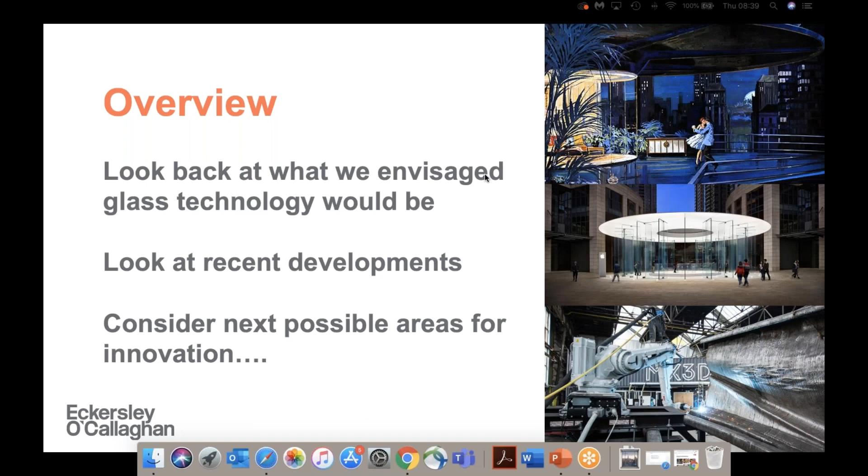So, given the type of specialist work EOC does, we often get asked the question. Sorry to interrupt you. The screen I see is just the Future of Glass retrospective. It's not gone into full screen mode yet. I can see your whole PowerPoint window. Okay, it's in full screen mode my side. I think it's stuck here. It says pause. Can you click the play button? I will press play. Is that any better? Nope, not yet. I will come out of it and come back into it again. Sorry about it. Yeah, I can see it moving now. Can you put the full screen now? Okay, it's full screen now. It's working fine now. Go ahead. Okay, I'll carry on. Yes, perfect.

Yeah, so I was saying, given the type of specialist work EOC does, we often get asked the question, what's the next big thing, or what will glass technology look like in perhaps 10 years' time? And I think this says a lot about people's desire to have the latest technologies and materials, normally before their rivals, and how we dream and imagine of solutions that don't yet exist, just out of reach, or more often than not, way out of reach.

Whilst we can use the metaphorical EOC crystal ball to get a good idea of what's on the horizon through our close links with industry and monitoring trends, our answer to these questions will always have its limits. But this got me thinking about what were the questions and imaginings 50 years ago? How close or how far have we come from realizing those today? So today I will look back to what we envisaged glass technology would be, look at some more recent developments and consider possible new areas for innovation in the future.

The 1960s are pretty synonymous with sci-fi futuristic images, and freed from technical constraints, people's imaginations often ran riot to project visions of their wants and desires. This was during a time inspired by the rapid and audacious achievements of the space age, so it was only natural to speculate about what was coming next.

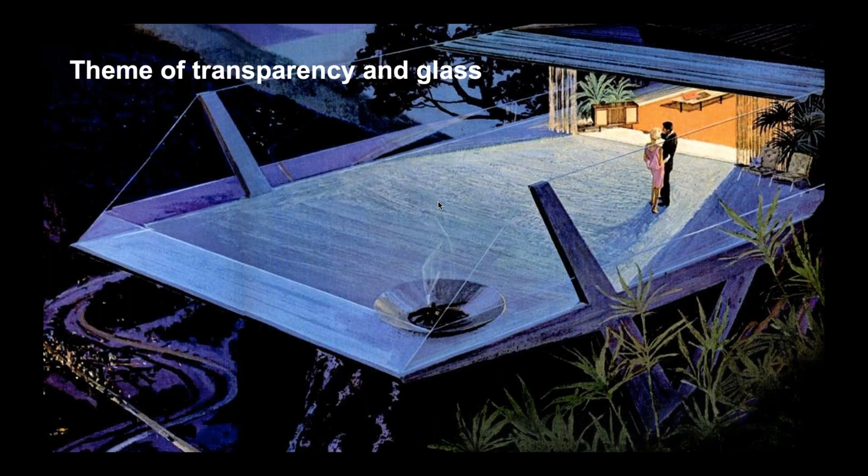It's perhaps no coincidence that around this same time, the possibilities for glass on buildings advanced significantly through the revolutionary float glass process that had been developed by Pilkington. This meant that large volumes of high-quality glass could be produced for the baby boomer generation. And this innovation must have stimulated great inspiration for what the future may hold for glass technologies. But I would ask the question, has there been a revolution on the same scale since?

A common theme in the illustrations is this one shown here, which seems to be some sort of luxury residential building, shows large format glass panels. These ones here appear to be around perhaps 6 meters tall, 3 meters wide. And with today's fabrication capabilities in large format glazing, the vision of the future is actually a reality. And in fact, it could have been a lot more ambitious. Some manufacturers can now fabricate panels up to 20 meters tall.

Some examples I'm showing here, this one from an Apple store in Boston, where we had to, at the time, utilize spliced laminated glass owing to the size limitations. And other examples, this one here in Hong Kong, this is 16 meters tall, as is this one in Singapore on Orchard Road. These were all made possible by significant leaps forwards in the manufacturing process, led by manufacturers such as seele, by investing in autoclaves that could laminate the glass into one piece.

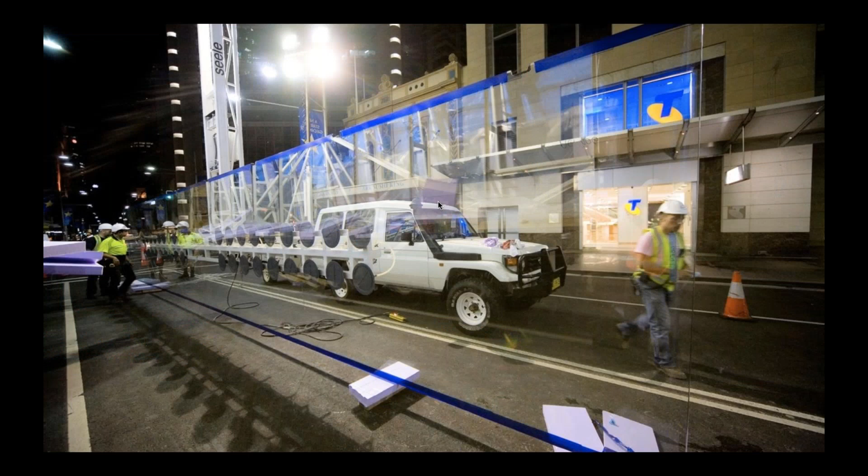In addition, thanks to current interlayer technologies such as SentryGlas, it's actually possible for the mullions and fins that were shown on the 1960s apartment to be completely removed. You can actually have the glass spanning from the floor to the ceiling without any additional supports. And there's an example shown here for an Apple store in Sydney that utilizes this process.

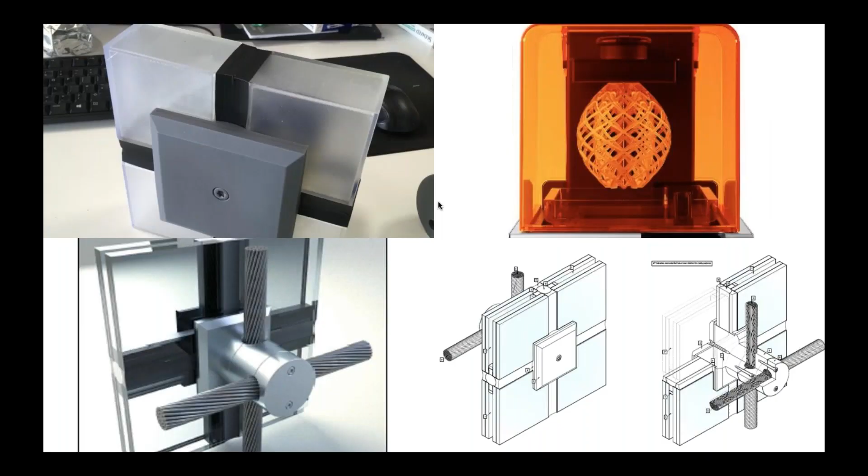Although not always made from large format glazing pieces, cable facade systems also enable large surface areas with quite minimal structure and maximum transparency. This is a project we worked on at Wisdom Hall in Bangkok that I'm sure Andreas will talk about a little bit later on today. And a key to successful delivery of these cable type systems is focusing in on the glass to the cable details. And this is something we spend at EOC a long time agonizing and analyzing and refining.

More recently, we've been advancing this concept further by fully integrating the cables within the glass system, so they're hidden, and they also utilize large format glass, creating facades that are achieving maximum transparency, as shown in this example from a Swire project at Taikoo Place in Hong Kong. This is something we're currently working on. It's around 15 meters tall, but you can see here, it's really achieving this maximum transparency, minimal structure aesthetic.

But where will the glass size stop? Transport and logistics are big limiting factors, but perhaps it's no good getting longer and longer panels if we're still stuck at 4 meters width. This example shown in this apartment overlooking the city below shows some single curve glass, perhaps around 4 meters tall. And again, this is achievable today with 18 meter long curved panels actually possible, subject to certain radius limitations, as shown here from an Apple project we did a few years back in Shanghai.

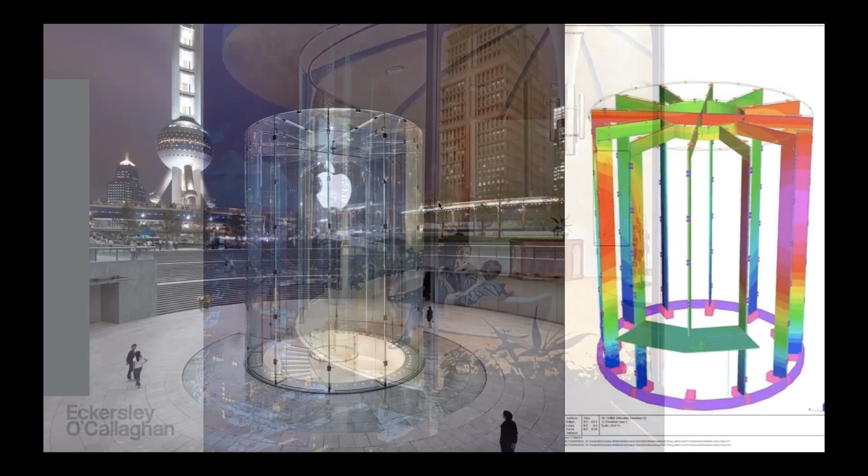But why were they confined to single curvature? Doubly curved panels can be manufactured to high optical quality using hot bending over molds, but strengthening is actually limited to chemical toughening, which then has an impact of limiting the size and also possible environmental coatings that are often needed for today's buildings. This project in Brussels combines flat tempered glass with single radius tempered glass and slumped complex curvature glass to create an interesting aesthetic that responds to the surrounding architecture, and again has no fins or mullions.

Recently developed cold bending techniques allow flat glass to be pushed into shape and then mechanically restrained in position either using the interlayer during lamination or via clamping on site. And this has opened up more possibilities in terms of size and geometry for curved glass. An example of this is the recently opened Apple store in Singapore in the Jewel development, and the visual quality is actually improved over other traditional techniques.

Today's interest in challenging transparent envelope geometries is inspired in part by advances in curved glass processing, but also by a progression in digital design. And I'll talk about this a bit more later on. As a result, we're seeing a great demand for ever more complex geometry, but this can sometimes be limited by costs, strengthening techniques, and the available coatings.

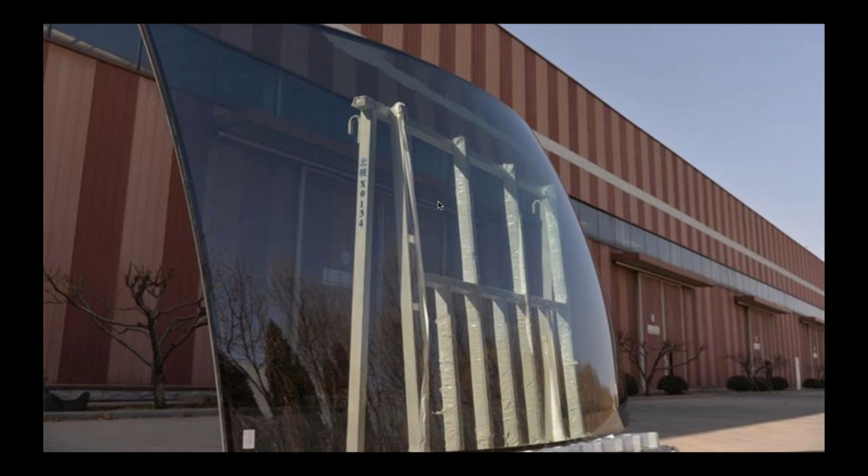But perhaps we are overdue a revolution in this particular area in curved glass, just as we had in the heyday of the float line process. And recent developments in double curved tempered glass make this a real possibility, as do further developments in adjustable and programmable molding technology. There are a number of groundbreaking projects currently under development that will show how much of a real possibility this is in the near future.

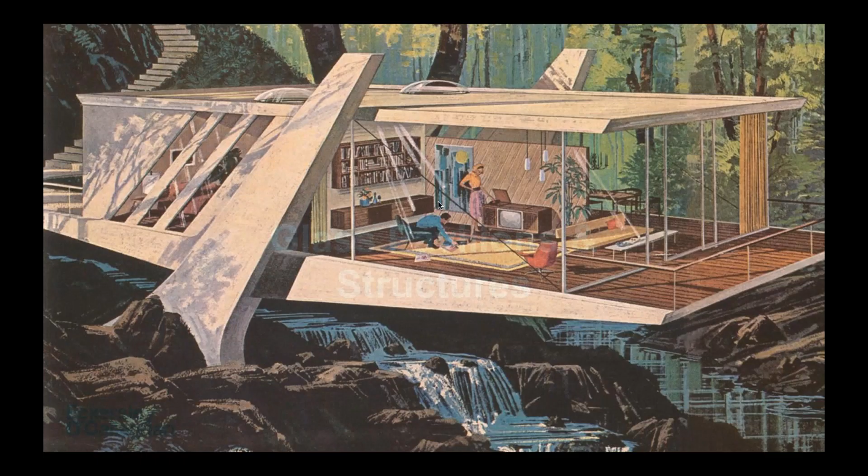This is quite an interesting image. I think it accurately foresees the idea of using glass as a structural element to create a full glass enclosure or pavilion. The idea of removing visually obtrusive structural elements has long been an objective for designers. And glass has potential for achieving this, but a lack of in-depth understanding of the engineering and a need for robustness has held this back until relatively recently.

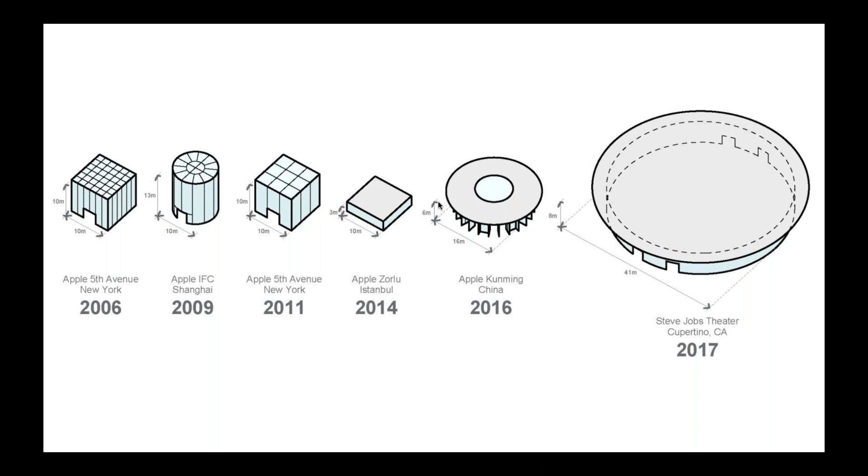I'm sure you know we've been lucky enough to work on a number of pavilion projects for Apple over the years, and on each one we've progressed and learned from the previous one. But perhaps one of the most well-known was the project in Fifth Avenue, the Fifth Avenue Cube, which has quite an interesting story because it actually started off life in 2006, comprised of 18 small panels per side.

But as production technology progressed, a few years later in 2011, it was redesigned and replaced with a structure that was comprised of only three full height panels per side, and therefore significantly increasing the transparency and removing the fittings, which often are the most visible elements. You can see an example of the difference here.

So from these state-of-the-art projects, we learned a lot, and so for the next one, we wanted to be even more ambitious. The Steve Jobs Theatre in Cupertino comprises a 40-meter diameter carbon fiber roof, supported on curved structural glass panels around the perimeter, and it just goes to show how far you can push the boundaries of glass as a structural material. Even the sprinklers and cables that go up to the roof are hidden within the glass joints. And to give you an idea of the scale, we can actually fit all the other Apple pavilions within the internal volume of the theatre.

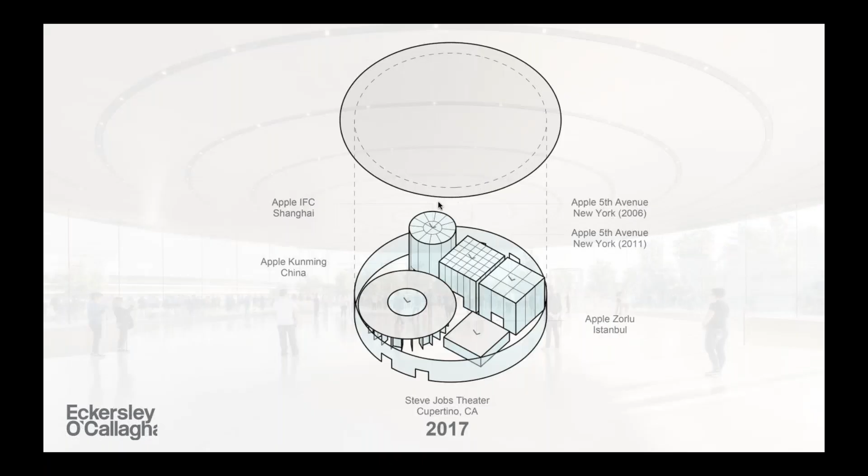Again, building on the success of this project, it led us to develop other structural glass pavilions, such as those shown here in Istanbul, and this one here in Kunming, which actually includes 5-meter tall pivot doors with titanium laminated fixings, a carbon fiber roof again, and a 6-meter spanning acrylic oculus in the center with no visible joints or supporting structure. And it also had to be designed to withstand relatively high seismic loads as well.

You can see that we're continually developing what's possible with glass as a structural material, and we have some projects under development that really push this to its limits and push the boundaries of what's possible. And perhaps next time I do a talk, I'll be in a position to share more information on that with you.

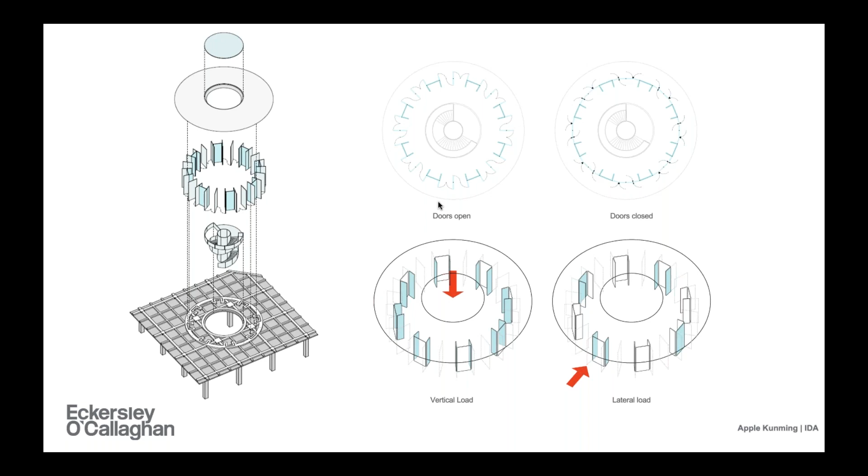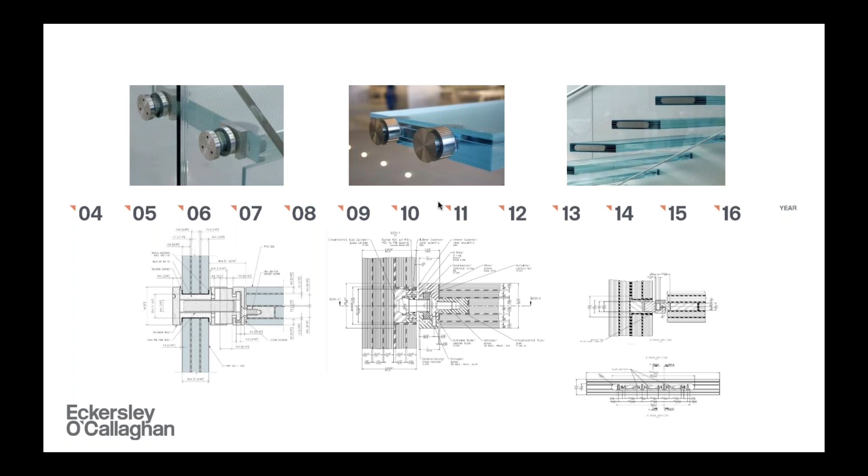I think achieving lightweight staircases that almost seem to float, as shown here, has always been a fascination for designers, even going back to the original cantilever stone staircases from many years ago. A lot of the development work we do around glass is about focusing on the detail and the fixings. And we always try to minimize them as much as possible to make them almost disappear. Some examples are shown here, which show how we could utilize the latest evolution in manufacturing process. But we think that we also played an important role within the project team in getting these developed in the first place.

In some ways, these ideas culminated in the staircase developed with Foster and Partners located in Guangzhou, which utilizes the glass facade to double up as the main support and therefore limits the number of visual elements. And as always, it's a nerve-wracking moment when they do the real life load test, although we have high confidence that it will work.

Over the last 10 years, we've realized increasingly transparent structural glass systems by incorporating fittings within the glass buildup. And I think the holy grail for all connections is to be fully transparent, and advances in transparent silicones and adhesives have huge potential, as does welding of glass seams together. And although glass sizes have increased dramatically with large format, they're still limited by transport logistics and local site constraints. And I think more intelligent methods of joining panels together is another frontier to be explored.

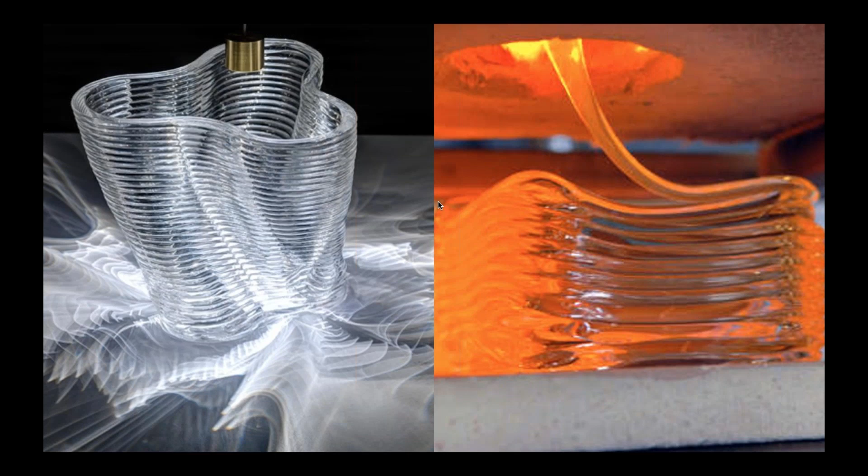For example, 3D printing of glass components is something currently being researched, as is the use of cast glass blocks, such as the example of the Crystal House in Amsterdam, which utilizes UV cure transparent adhesive. We've also been developing our own research projects, such as this glass seesaw shown here, mainly to show how technologies could be best deployed and give some inspiration for others in the industry.

Other transparent materials like acrylic could come to prominence owing to their ability for large panels with invisible joints, although their use is currently hampered by fire resistance and limited solar gain performance for facade panels, but this is something that is also currently being developed and progressed.

This is an example we're working on, a project in London which is currently under construction, the Skypool. This uses acrylic to span between two buildings around 14 meters, 9 stories high up in the air.

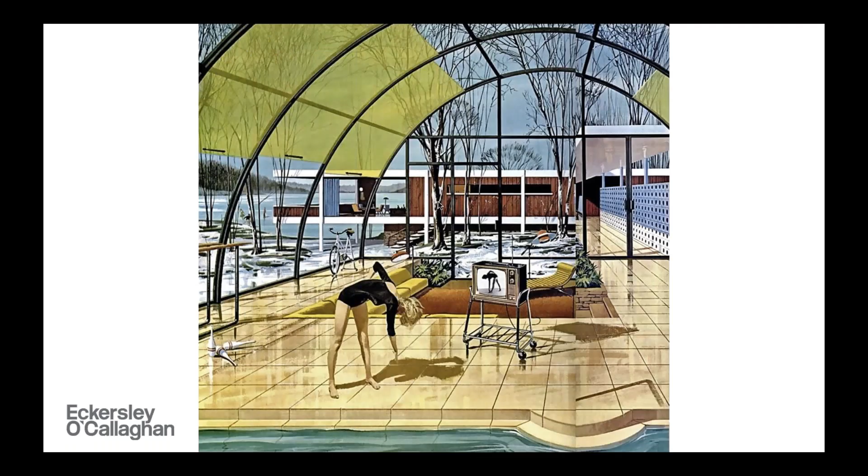This is quite an interesting illustration. It shows their idea of a futuristic glass enclosure that evokes perhaps the greenhouses of old. I'm drawn to the image's depiction of shading. It acknowledges a need for human comfort, but probably not the issue of energy consumption. There may have been less consideration of the solar gain and its associated sustainability impact back in the 1960s.

But since then, high-performance coatings and other glass treatments, including solar control and low E, have developed considerably, in part in response to ever-stringent energy requirements and code requirements. The big challenge is always how to overcome the contradiction of having better light transmittance, but also reducing solar gain at the same time. And today's standard technology offers perhaps more reflective and darker glass than was envisaged in this image, but it's making headway into achieving ever more transparent glass.

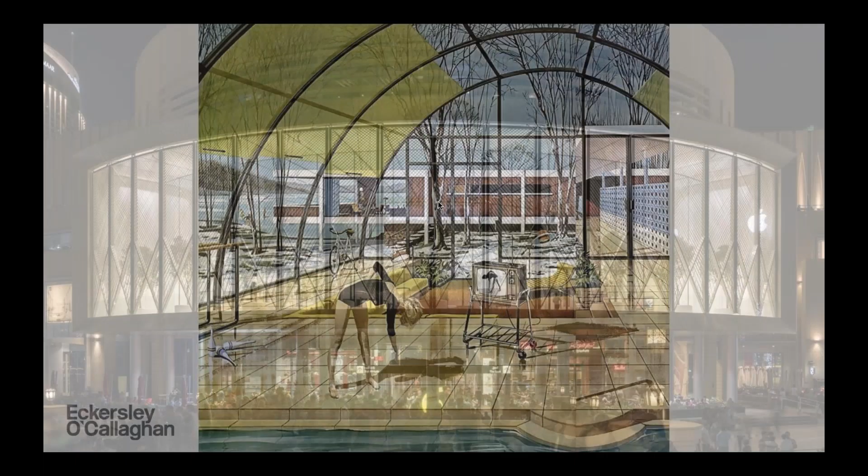Looking to tomorrow, current developments in dynamic shading and dynamic glass, which can change the light transmittance and G value, are promising innovations, especially for warmer climates. There are different approaches. For example, the Merck liquid crystal modules are intelligent glass facades that are linked to the building management system, and these could become more common as their costs reduce and people become more familiar and it becomes more established within the industry.

Another example is closed cavity facades with integrated blinds, which build on the development of older double skin facades, but integrating the elements into a single sealed unit and therefore reducing the overall thickness.

I think the thing that's becoming ever more important, though, is the embodied energy, the embodied carbon, and recyclability of glass and associated components. And it's not just the end performance, and I think this is something that needs full collaboration from across the industry to help deliver truly sustainable buildings of the future.

So what would we dream of today? If we were to produce a similar set of images, what would our imaginings of the future be? I wonder how much of today's glass developments would feature in these. Are we overdue another revolution, as mentioned earlier, with curved glass?

Or I suspect that we'll continue to see more incremental leaps, branching off into many varied performance aspects and requirements and systems, as shown here, some notable examples over the last 50 years. But there are some areas that we can see might be of particular interest, and I'll just share some quick thoughts, from my perspective, on how these could possibly develop.

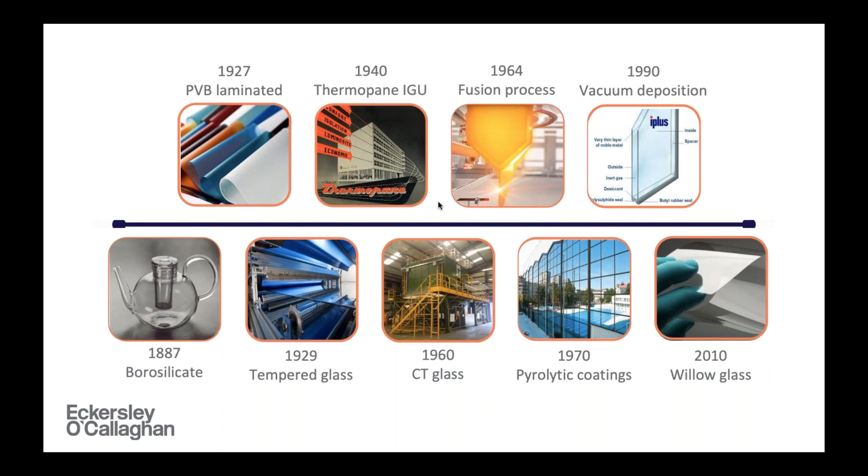So new materials: an area for inspiration could include the high-strength thin glass technologies. These were originally developed in the 1960s for the automotive industry, without great success at the time, but they've been revitalized for the smartphone industry. And they've yet to be really fully utilized within architecture, but they have some interesting potential for kinetic structures to enable adaptability, and also where weight saving is potentially important.

With rising sea levels around the world, will weight considerations become ever more important for things like floating houses as they are for ships today? We've been working in the sector for many years and designed glass for several large super yachts, which require both high strength due to the high wave loads and extreme environments, but also trying to reduce weights wherever possible.

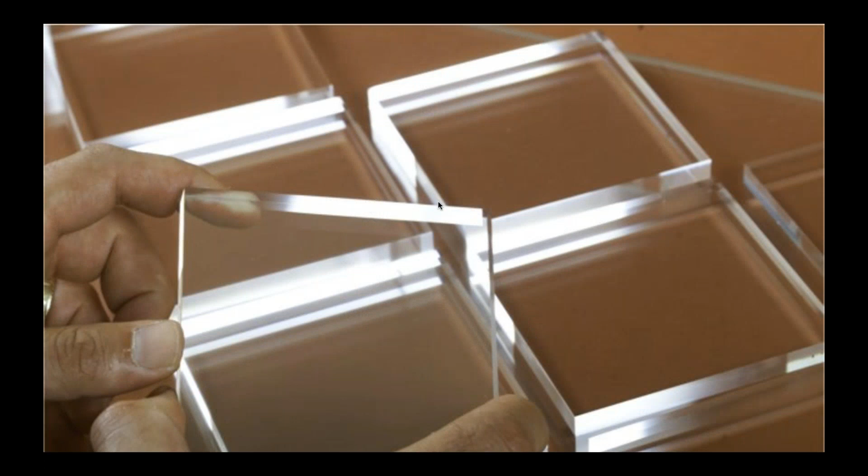There's long been talk of new transparent ceramics, such as so-called transparent aluminium or aluminium oxynitride, revolutionizing the industry. But today it hasn't made significant developments, partially due to costs and complex fabrication. But I suspect in the not too distant future, new transparent materials will become more widespread as evolutions in manufacturing processes continue to happen, and aligning with the digital design developments as well.

And just as discovery of things like graphene is infiltrating its way into mainstream use in other industries, I think that there'll be cross-pollination of ideas from other industries back into architecture. But I think sometimes it also takes clients to invest and develop these technologies for them to filter down to wider use within the industry, just as Apple did with large format glazing.

Although not a specific technology in itself, the processes and tools that we use to design and fabricate projects which incorporate glass have been advancing significantly recently. And we see digital design as an area that can really speed up progression on many fronts. An example is where we've developed our own scripts to analyze which curved glass types can be used within a complex envelope geometry. And we can make suggestions on how to optimize the curvature to make best use of the available technologies and hopefully reduce costs for our clients.

And it also allows us to optimize the structural design of large span steel and glass structures, as shown on this project. This is P&O project, Iona cruise ship, where reducing the weight was key in limiting the impact on the overall ship weights and buoyancy calculations. The digital design tools meant that we could reduce each of the section sizes down to the minimum, and more importantly, we could do it very quickly.

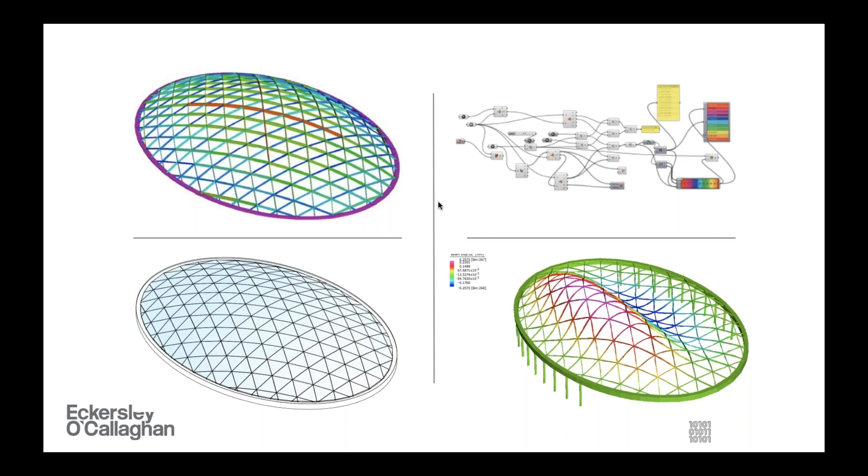But it's not just in the design that it adds value, it's also the possibility to truly link the designers with the makers, such as 3D printing developments that make it a really interesting, exciting prospect for the future. We've recently finished our concept project using these tools, and this is for a project on Mars.

In this image, you can notice that as ambitious as the architectural intents were for the glazing, the media and TV was fixed on what Motorola were producing at the time, which is perhaps understandable. This is an advert at the end of the day. But with the digital world so embedded in our culture, I see this as becoming more widespread in the future. There are technologies on the market today which integrate LEDs within the glass, but I can see higher image quality and definition and more transparency being what clients really strive for. And there are a few interesting new technologies on the horizon that will hopefully help to achieve this.

As I mentioned before, sustainability continues to be one of the key areas to develop and be at the forefront of what people are considering with the technologies. Products such as AGC's Fineo vacuum glazing that avoids the need for glass valves are very promising in reducing overall U values, especially for retrofits of older single glazed panels. And retrofits, I think, will become ever more important as part of the sustainability drive.

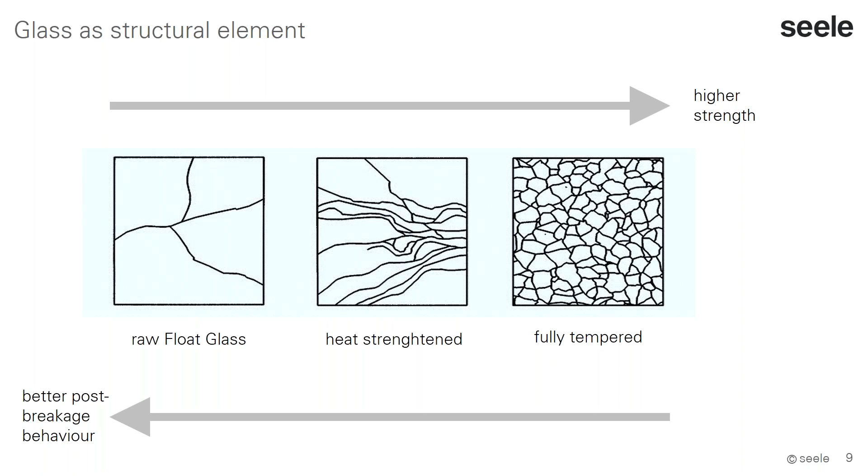So we have to keep in mind when we look at all the projects that are following now, that the higher the strength of a glass is, the smaller are the splinters it is breaking into. And the larger the splinters are, the better is the post-breakage behavior, especially in a laminated glass package. We have to keep that in mind. We always have to combine these kinds of glasses in the right way to achieve the structural behavior and the post-breakage behavior as we need it in our actual projects.

So now let's have a look at the rooftop viewing platform and glass cylinder for the Mahanakhon in Bangkok. Here you see the project. Most of you will know it. It's the highest building in Bangkok currently with over 300 meters. There is one glass tray, an observation platform there, and there is a glass cylinder, a double cylinder with a spiral staircase leading up to the rooftop. And then you can walk over to visit here this Skytray observation deck.

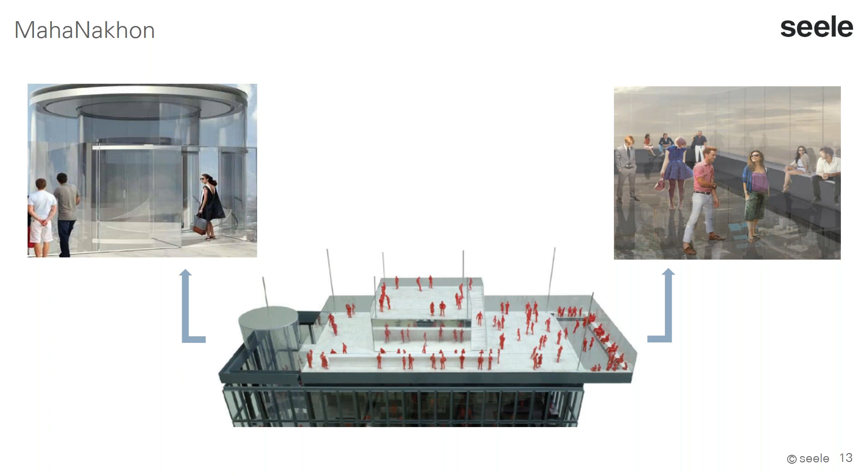So it's a 60 square meter observation deck we are dealing with here. And this is what we received in the beginning, mainly with the question whether we would be interested in doing that job. So we had the first meeting, and the discussion was that the architects' and the consultants' idea was having this glass tray here with a glass member below it supporting it. The issue was that the only offers they received were using steel members. Nobody dared to go with a glass member in such a platform.

So we went looking into that, and we came to the conclusion that it might be even better to have no glass or steel member there at all, but only have the glass panels spanning freely to the other side without any further support. So that was the proposal we made to the client, and the client decided that that is the way to go.

So when we are looking into this kind of structural glass application, there is one very, very important factor. That is that the SGP or PVB, whatever you use for the lamination of the glass, changes its elasticity modulus over temperature. The warmer it gets, the softer it becomes. So you have to consider that very carefully at the beginning of each project to come up with the right thickness of the laminated glass package. So we spend considerable time on these kinds of early assessments on a project.

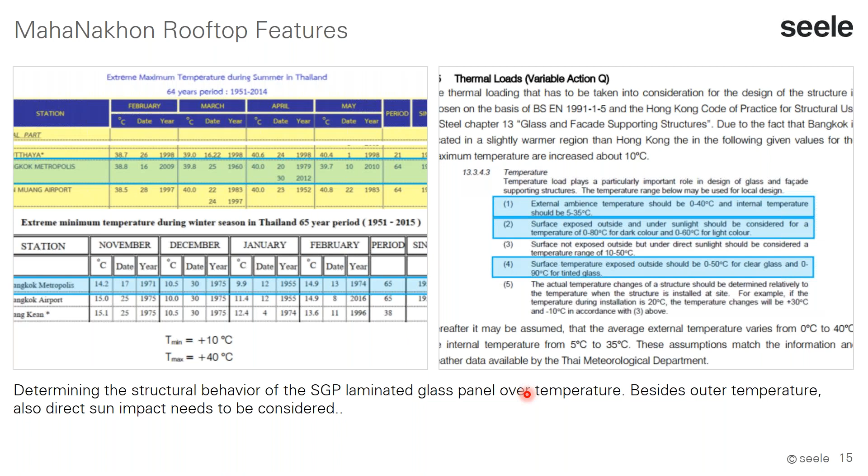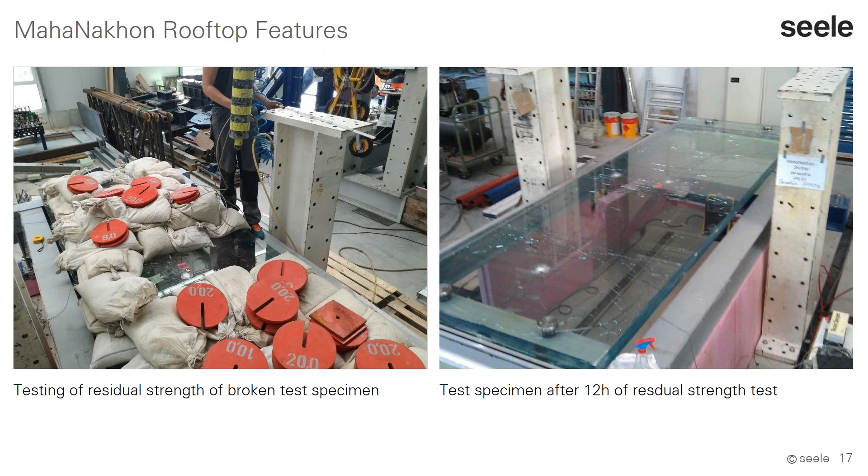So after we started working on the project, obviously we had to do a lot of testing. We did one of those glasses here. We did a permanent load test. We did a hard body impact test that you can see here. And we tested the residual strength of the broken test specimen. That's the test specimen here after 12 hours of residual strength testing. And this was, in the end, the result.

And we tested that extensively, and I can assure you this thing is as safe as any floor could ever be to stand and walk on. Even with a total failure, it will not fall down. It will sag down a bit, but it will be retained in its position and held back by those special point fixings along the edge of the glass.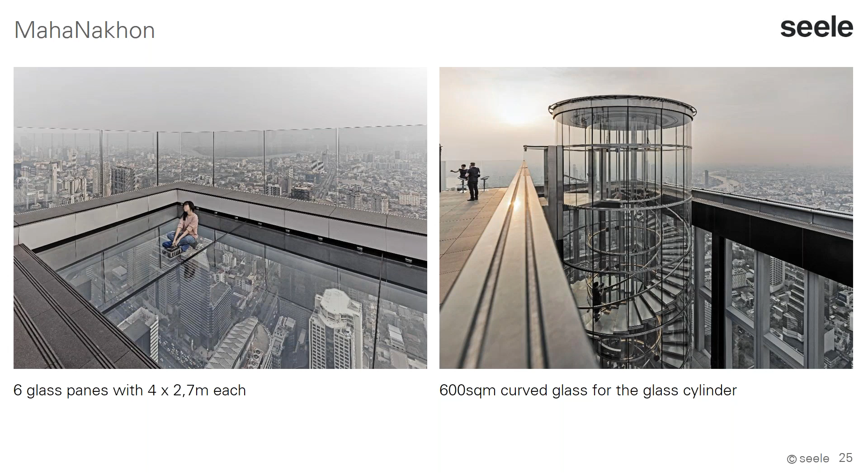So based on that design idea, we start then to develop a proposal. So we made the first 3D drawings. This is all via tender phase. We made the first 3D drawings or 3D models of it. We make the first structural calculations. Here we apply wind load. Even if it's an internal staircase, you still have to apply a certain wind load to it.

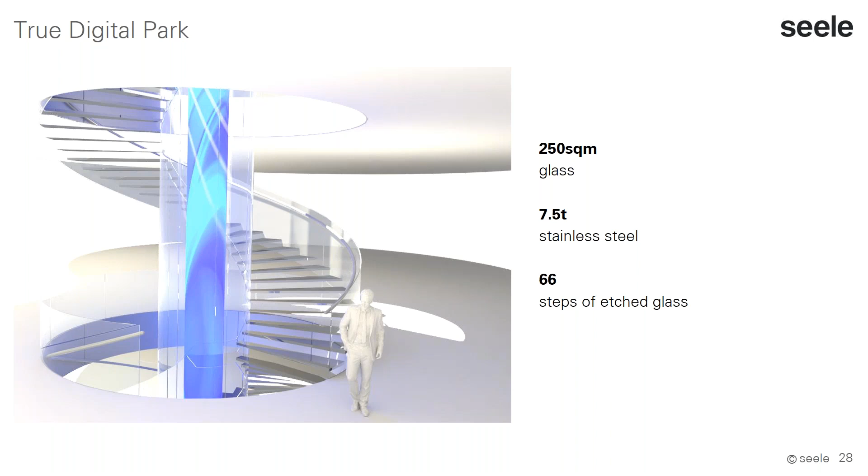Here you see the first assessment of the deformation under live load and the people walking up and down. So after we finish all those first structural assessments, we know the approximate glass thicknesses, and based on that, we can then do the first visualizations.

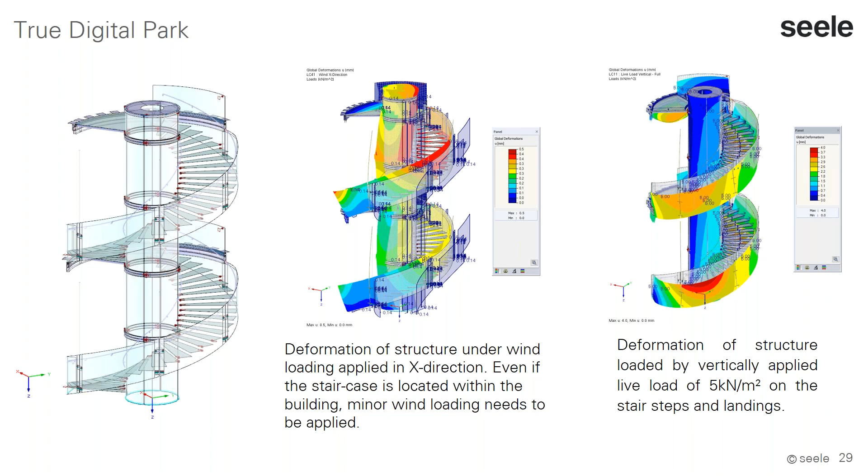So you can imagine the relative position of the inner glass cylinder to the outer edge here of the concrete needs to be perfectly aligned. Now the concrete itself is obviously not so nicely aligned. So we had to put a lot of effort into this construction here to equalize or to neutralize all the tolerances and bring the inner glass cylinder into perfect position relative to the edge of the hole in the floor, or to the steel connection construction on the edge. This needs utmost attention, and it takes relatively long to get that properly done.

Then we start with the installation. Again, here we have a wood scaffold to go up and up and up. And then when you already think you are up and you are very happy, then it happens, a glass breakage here. And you can see it happened on the lowest level. It's the lowest glass of all glasses. So kind of a worst case.

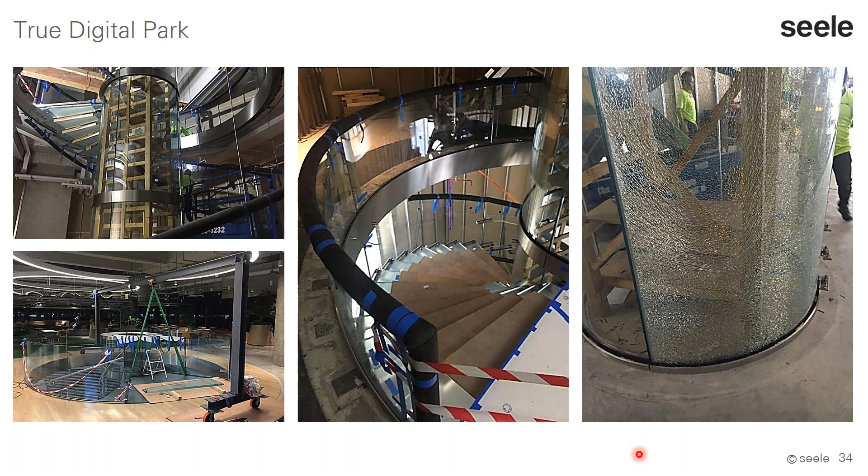Luckily, when we started with the design, we had several meetings with the client, and we could agree with him that we increase the size of the stainless steel hub, this ring that is going around the staircase. We increased it to a size big enough that it would allow the exchange of a glass in case of breakage, even in the lowest level, without de-installing the whole staircase and building it up again. That was a very, very good decision. So this stainless steel hub is now a little bit higher than it was originally architecturally anticipated, but it was a very wise decision to enable us to change the glasses.

So now let's have a look at Icon Siam. ICONSIAM is a huge shopping mall in Bangkok. We finished that project a little over a year ago now. Let's look into it. We have 5,300 square meters of this ICONLUXE facade, that's how it's called. The total height is up to 24 meters of spanning glasses. The glass panes are inclined in 2 directions, and they are arranged in a jagged zigzag pattern. And the floor plan is not just a straight facade, it's also curved. So you can call it a 3-dimensional nightmare, maybe. We have 333 glasses and 333 fin glasses here.

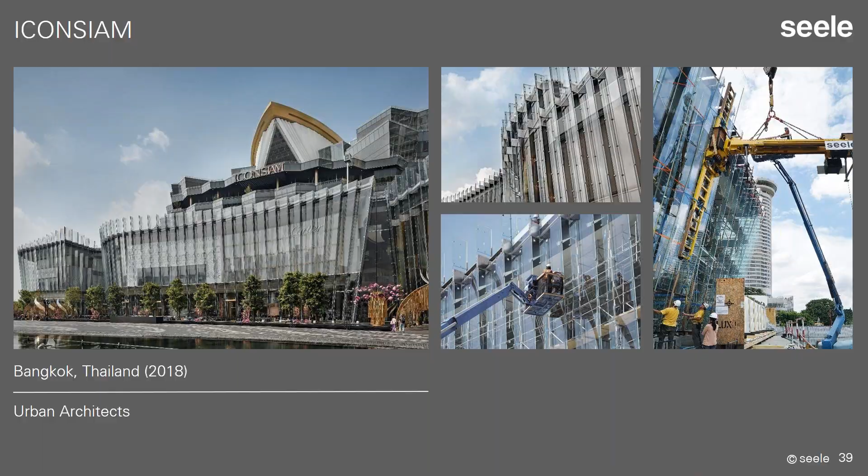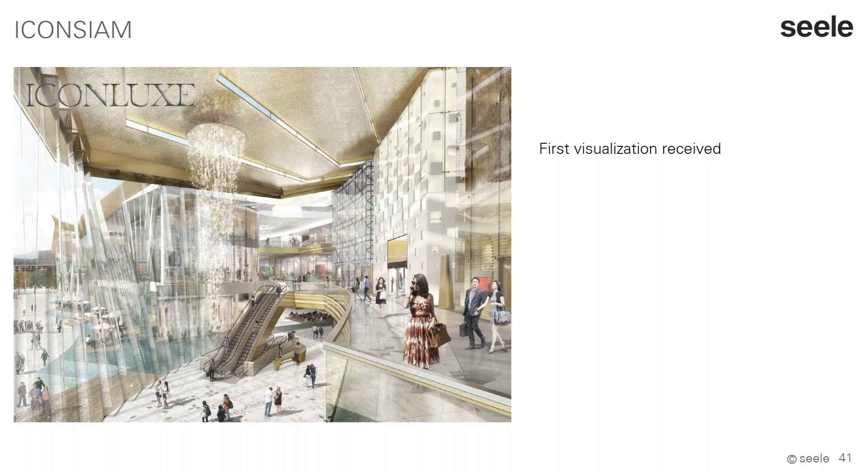So I received early 2016 this picture with the question, can you do it? I answered back, yes, maybe. It's hard to say whether we really can do it just with that, but that answer was enough to be 2 days later in a meeting in Bangkok discussing the project with the client. The client had a tender out already, but he didn't receive any satisfying answers back. Actually, he received more tender queries back than answers. The client did not want to give us the tender document, so he just gave us a SketchUp file on a memory stick. That's it. And based on that SketchUp file, we were supposed to come up with a price within 2 weeks' time.

So quickly, we started doing our first structural assessments again. We started doing some basic details. We did some first 3D visualizations of how the thing could look. We went into the estimation of the project and came up with the first pricing.

Another step, we had to look into different situations on the project which were leading to different glass thicknesses. That was our first estimation here: glass fin 50 millimeter red, 60 millimeter blue, and 70 millimeter in the green area. The green area is where the glass fins are spanning up to 20 meters freely without any support. Based on that estimation, we did our pricing.

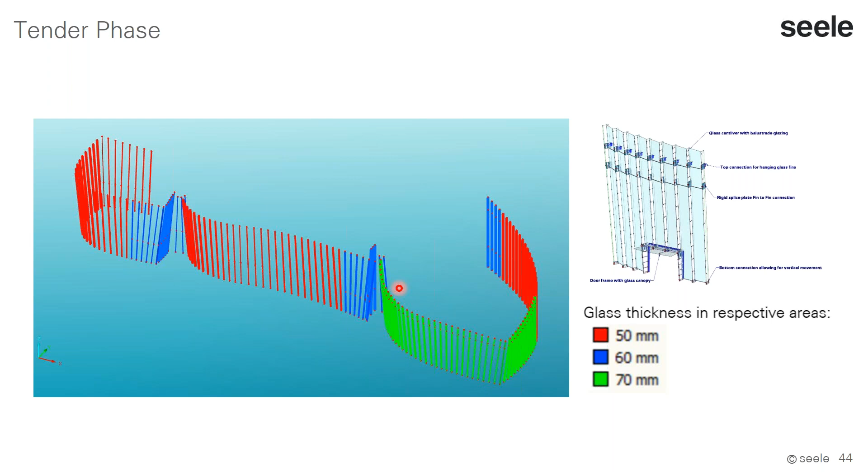That also played a very important role here to achieve maximum transparency. So the last hurdle then to sign a contract with the client was to double check the reaction forces on the existing structure. So this is also an exercise we had to do, reaction forces, to see whether the project itself can take the load of the glass.

Originally, we wanted to stand the glass on the floor, but the project was already prepared to suspend it. So the concrete on the floor was not able to take the loads. So we had to suspend the glass then from the ceiling, which we then did. So after this reaction force check was also confirmed to be good, we could go ahead then with the project itself. So we start now the real design and engineering.

We have to be clear here that the model we are working on needs to reflect the actual situation on site. Because we cannot cut any of those glasses later and adjust it if the concrete is suddenly a little bit in the way of the glass or something like that. So we had to harmonize all the 3D models that were out there with the architect, the main contractor, the client and us, to have one model that really shows the final situation on site. And we had to make sure that any change coming from the architect side is also incorporated in time into that model, to make sure that we are all working on the same data basis.

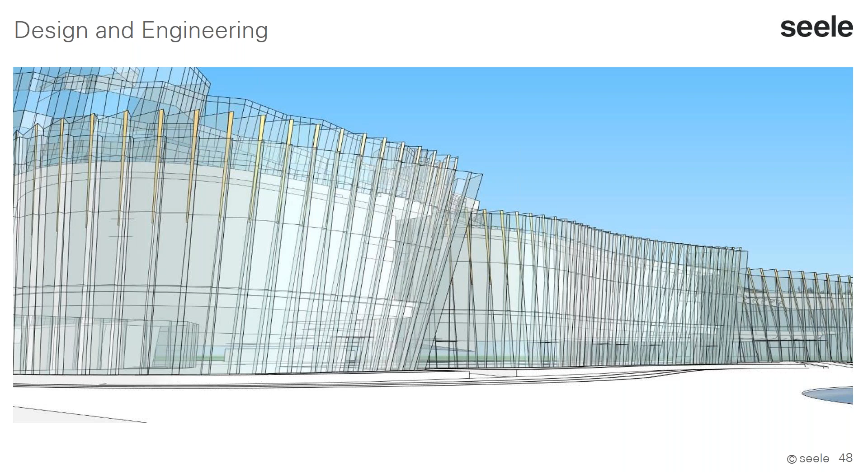Then again, this very, very important temperature issue. So also here we did an extensive assessment on surrounding temperature, on sun impact, and so on, to really know how much the glass is heating up in the built-in situation, and from there come to the conclusion about the glass thickness and the glass buildup.

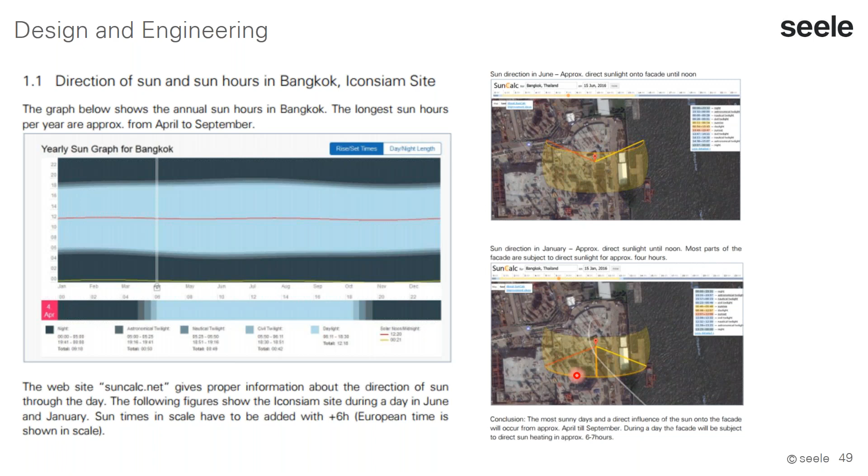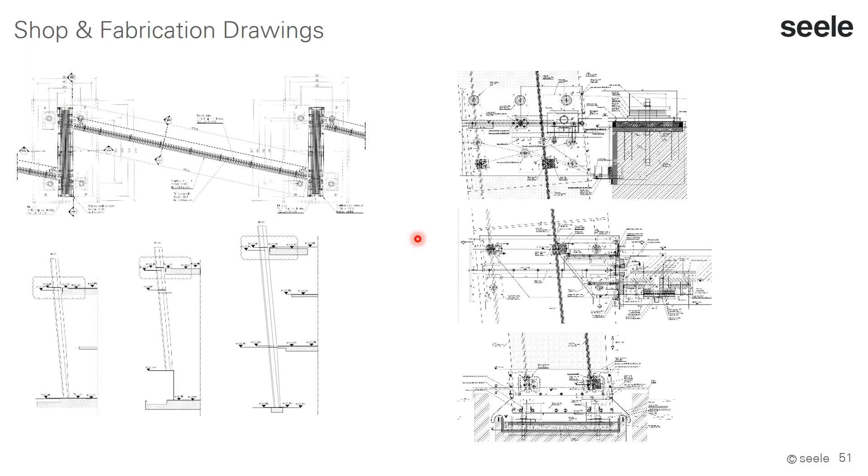Then after all of that was done, we could finally go into fabrication. Here you see our steel fabrication in the Czech Republic. This is Seele Pilsen. And this here is one of the stainless steel brackets where the glass is later suspended from. So this slot here is where the fin is later going in, where it is fixed and where it is suspended from. We will see that fin later.

Here you see now the glass production in Sedak. Here you see some pre-manufactured, already drilled and cut fins before the lamination process. And here you see how these fins later go into the autoclave for their lamination. Massive glasses.

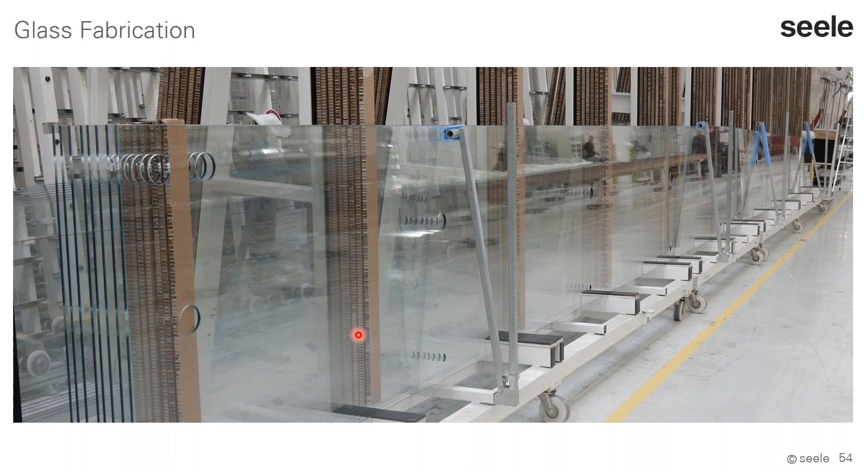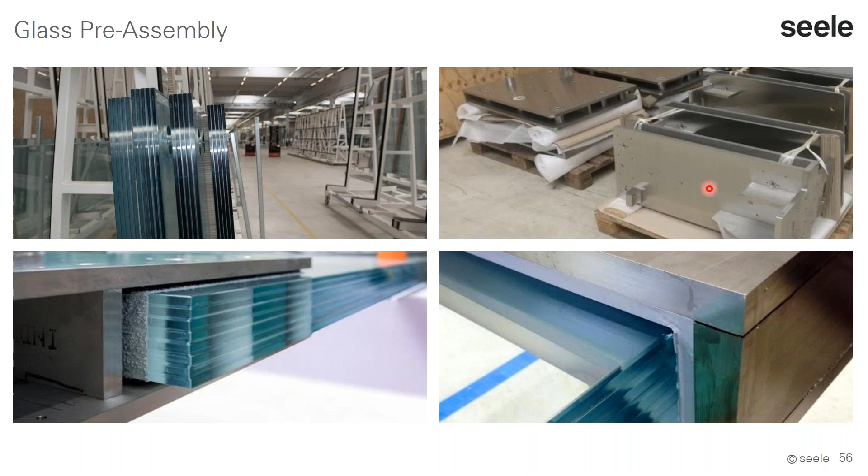Then one huge advantage of having this in-house production depth for Seele is that we can do a lot of pre-assembly already in our own facilities. So the steel is coming from our own steel workshop in the Czech Republic. Then it is pre-assembled in Sedak. So stainless steel shoes here are connected to the glass fins already. Here you see the final product, a stainless steel shoe with the glass fin. From here we will go into the packing.

Here we build the wooden crates to send it, because these things are far too big to put into standard containers. Then the box goes onto the truck and it goes on its way to Bangkok. Here the situation in Bangkok, the unloading in the harbor. Then we go through the narrow streets of Bangkok onto the site.

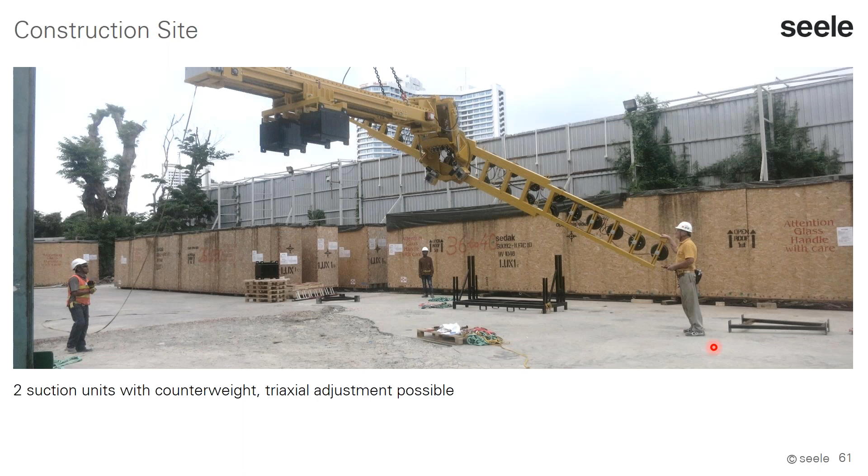Here it's already arrived on site and we are bringing our glass lifting machine, the glass suction machine, into action. Here you see it has a head with the suction cups, and this can move three-dimensionally by remote control. And here the counterweight to keep it straight during installation. So we started installation from the right-hand side to the left-hand side. Here you see the scaffold, and on the scaffold you see these little platforms extending out of the scaffold.

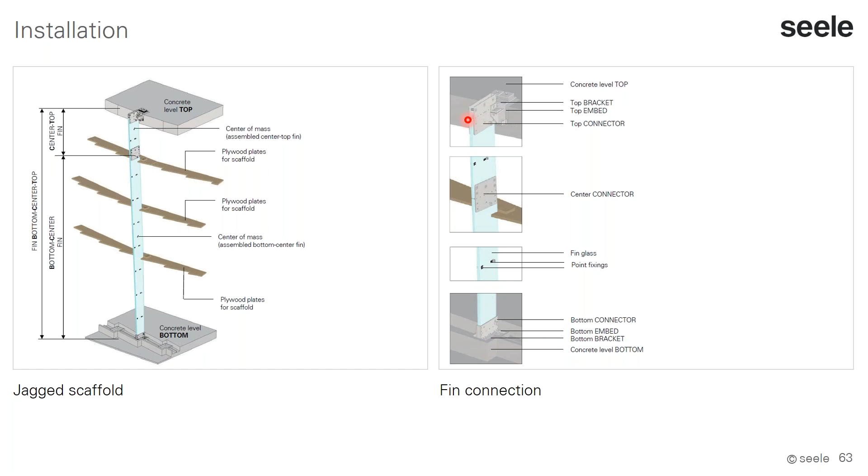Actually, these extensions here are shaping the facade already. You can see it here. It's jagged, jagged, jagged, and it's perfectly pre-shaping the whole facade structure there. We need to do that because, due to the fact that the fins are not vertically standing here, they would actually deflect in one direction, and we don't want that. We need to fix them somewhere, so when the front glass comes in between, the fins are not in their way.

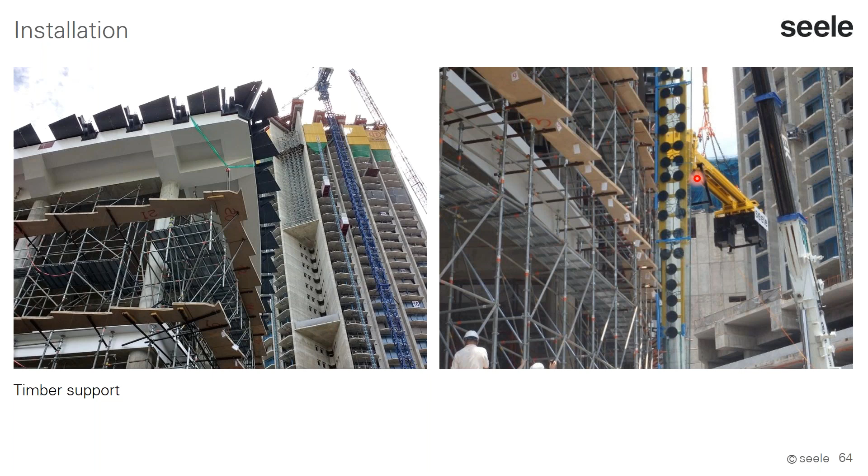Here you see it now on site. You see all these jagged wood platforms fixed to the scaffold, and the glass is coming here now with the glass suction device in action. And here you see now those brackets we just saw in production in the Czech Republic, already installed now on site.

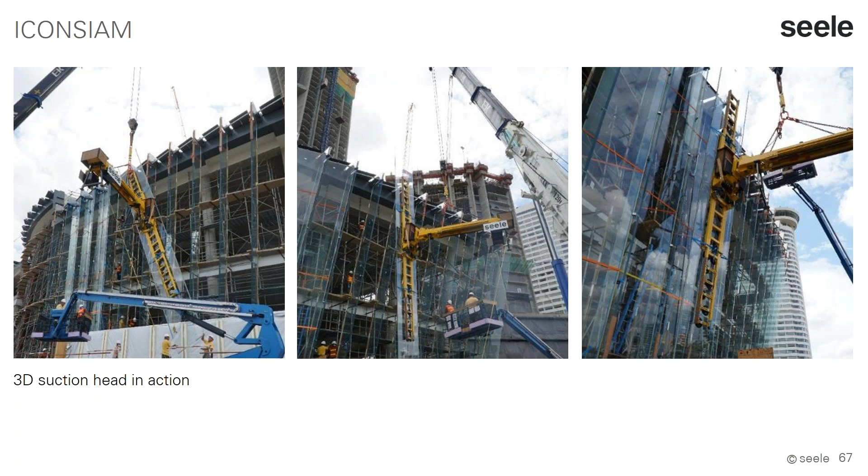And here the glass sucker in action. You see how it's turning and twisting. It needs to do all these movements so you can position the glass in all its different built-in situations here. So it's a real high-tech machine, this glass suction machine here. And we go along with the installation. Also, protection of glass edges is, of course, super important, especially during installation. Here you see us going along further.

And now the question is, how do you check the precision of the installation? This is very important to know because you want to make sure that there is no overstress of the glass due to imprecisions in the installation. It could be enough that at one position the glass is 2 centimeters too far outside or whatsoever. It could already create a higher stress in the glass than what you actually want there to be. And that would be risky. So we always have to make sure that everything is installed just perfectly.

So we take pictures of the facade with a special lens with a defined focal width and focal length. And with these special pictures, we overlay them with a 3D model we have from our engineering. And here we could even see the smallest deviations from theory. And we can make sure it's perfectly installed. Very important.

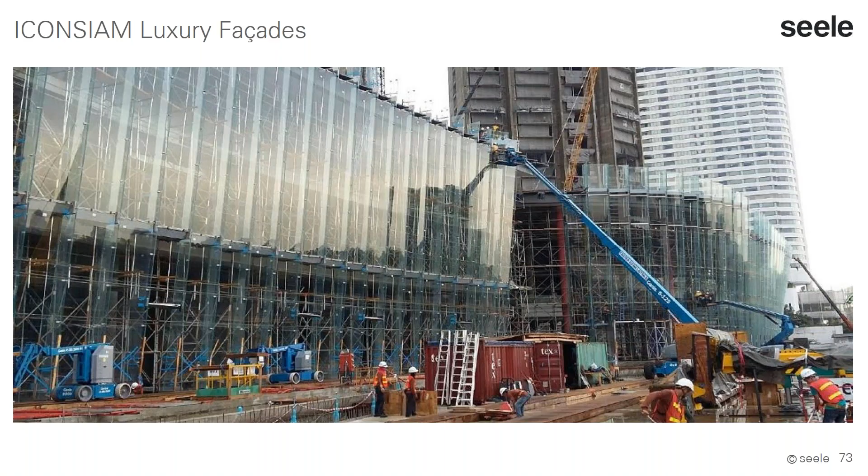Here we go along with the sealing. The sealing of this kind of construction is very important because the sealing also has a structural function here. It's structural silicone. We have point fixings here, but the point fixings alone are not doing the structural job. We need the structural sealant in addition, but it's also, of course, important for long-term water tightness, and also the sealant needs to look perfect.

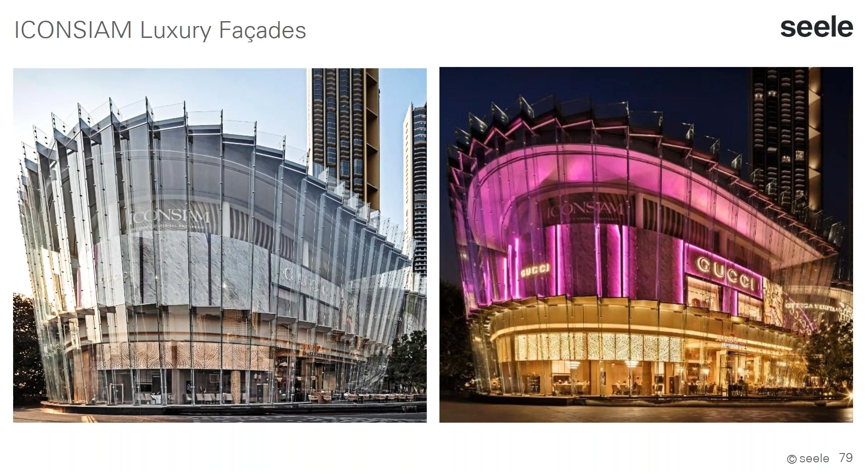And some day and night comparisons. Day and night again. And I think the visibility of those logos here is just great, even through such an odd angle. Some more detailed impressions. And what's also great, this facade is reacting very, very strongly to the outer weather. It reflects the weather. If the weather is dramatic, the facade is dramatic. If the weather is sunny, the facade is sunny, happy. Amazing, amazing facade.

So now there is supposed to run a video, but it doesn't. Can you click on it, Andreas? It doesn't look like this video. I'm trying here. Is it embedded in the PowerPoint? Something is wrong. It is embedded in the PowerPoint, yes. I have no idea what it is. It was starting when I normally did the presentation. It's just now that it's not starting. Fine, no worries. You can probably continue, and then at the end you can probably play the video. Exactly. It's a pity, but let's continue.

Okay, let's have a look at the Wisdom Hall now. The Wisdom Hall is what Ian already mentioned today. It is this triangular steel frame on top of the ICONSIAM with a cable facade inside. Very challenging job to do. You see here outside the Wisdom Hall, there's nothing. It's just going down with another facade. There's nothing you could work from.

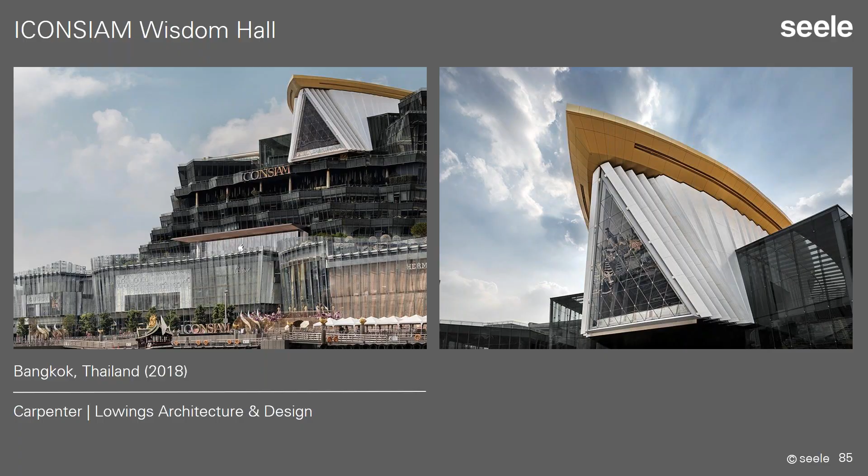So we are talking here about a stainless steel frame of approximately 80 tons, 64 triangular panels of glass, 14 tension cables, and 21 nodal points. So what did we do there? Since there was no area to work here on the outside, we had to build up a huge space scaffold, and we had very stringent lifting limitations there.

So we could only bring up here small chunks of steel, and those small chunks of steel we had to connect here on top of that platform. And then all of that was fixed here with huge hinges against the concrete. And then it was pulled up with cables into its final positions.

I have a wonderful video showing that. I'm just afraid it doesn't work now as well, the same like for the Iconsiam video.

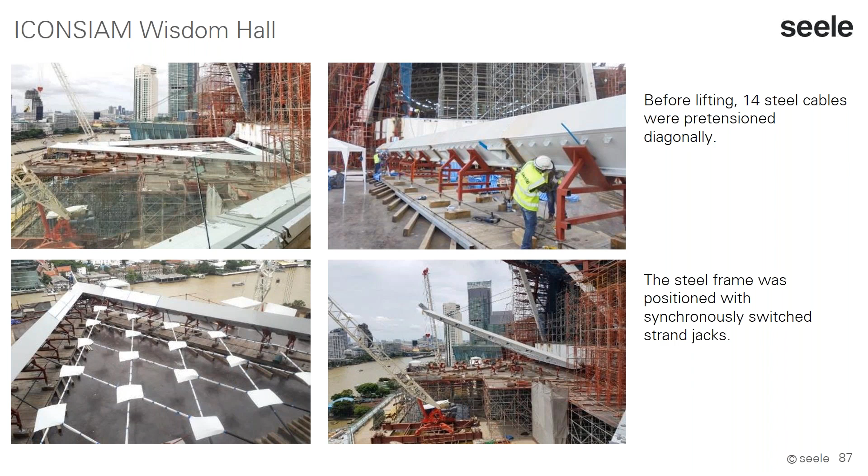And again, the video does not work. Whatever the reason might be, it shows me here running, but it doesn't run. So sorry for that. Maybe we can just have a look at it later. I will open it maybe directly from my screen. And now I have another issue here because my mouse is not working anymore. A moment.

Oh, okay. All right. As a last project, let's have a look at the glass tube project for the K11 Musea in Hong Kong. Here we are using glass tubes as a structural element. Those glass tubes are spanning freely over the whole height. It is 69 glass tubes, to be more precise, inside with the so-called CCF, a closed cavity facade system. I will come to that.

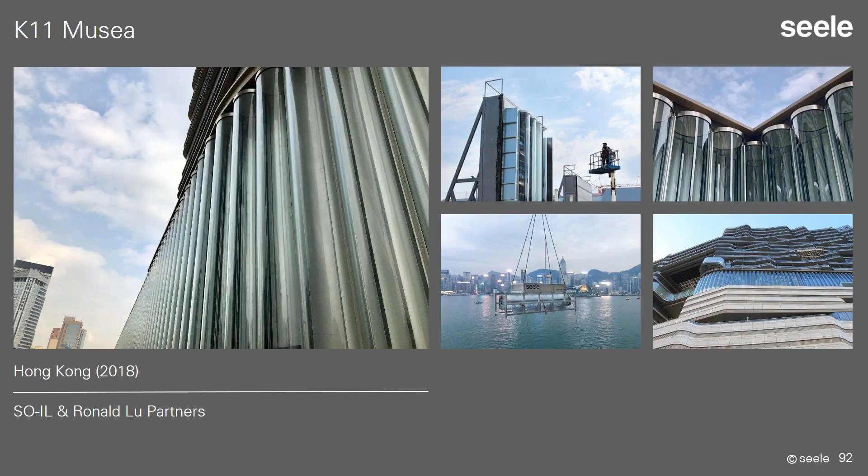So this is the facade on the project, consisting of those glass tubes, 307 tubes, 919 square meters. So we have 307 tubes, as I mentioned, 238 half tubes of those and 69 full tubes. The height is up to 9 meters and the diameter is approximately 950 millimeters. The half tubes are connected here in between with aluminum profiles, and each is fitted with a polished duplex stainless steel lid on top and on bottom.

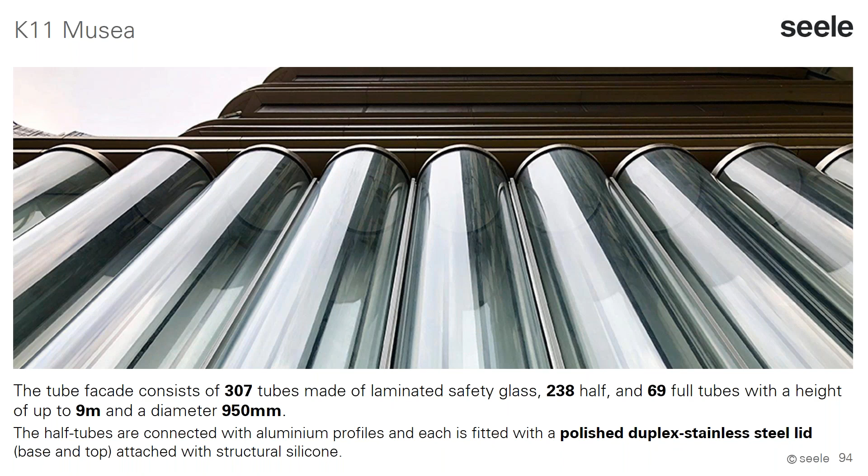This stainless steel lid here is fixed with structural silicone, and it has to hermetically seal this glass tube, because with the CCF technology, we are applying a slight overpressure of air inside the tube, and by that supplying it with clean and dry air, because we have to avoid any residue on the glass here, since these tubes are not accessible from inside. So we had to make sure that this works without maintenance from inside, and we need to be totally sure that it always remains hermetically sealed.

So this is especially difficult because the building has a relatively strong movement, an interstory drift. So these lids at the top and at the bottom closing the tubes again are fixed to the construction of the building. And here you have to take the movements without ever compromising or damaging the tightness of the structurally applied lids to the glass tubes. A quite tricky design, I have to say. It looks much more like mechanical engineering than the usual facade technology.

So since the structural requirements in Hong Kong are very, very high, and the local authorities, they expect a lot of structural calculations and reports and performance mock-ups. So we also had to do performance mock-ups for that and really show them that this thing in fact works.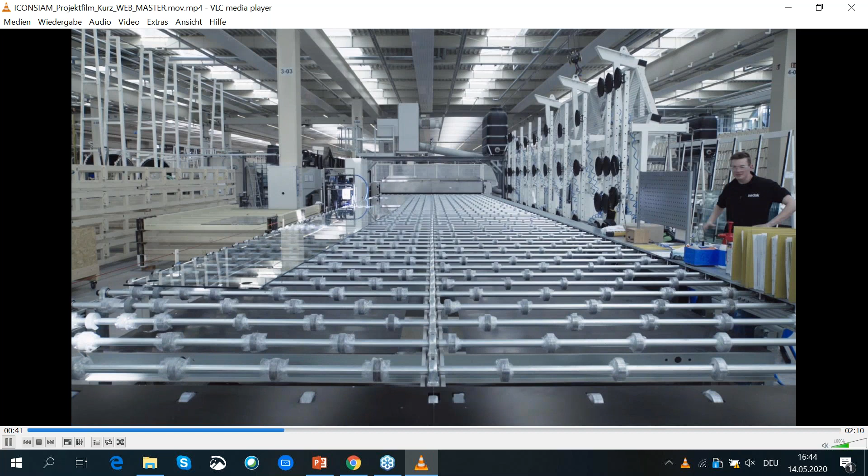So here you see again the design and engineering phase, modeling, the glass production in Sedak, in Germany. Highly automated production, obviously, cutting of glass, drilling of glass. The steel production in the Czech Republic, in Pilsen. Here this corner bracket we saw before.

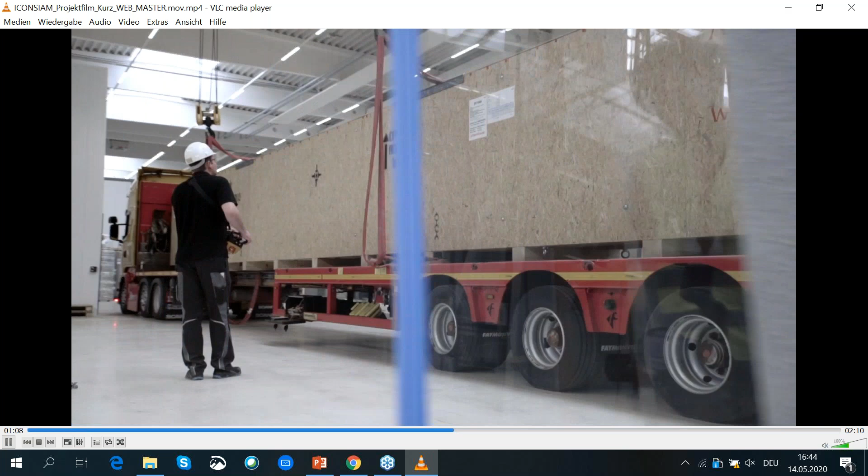Glass after the lamination, the application of the pre-assembly of the stainless steel shoes to the glass fins. Now going into the packing, ready for shipping. Arriving in Bangkok. Going on site, unpacking. The same bracket again, our most favorite one, going into position.

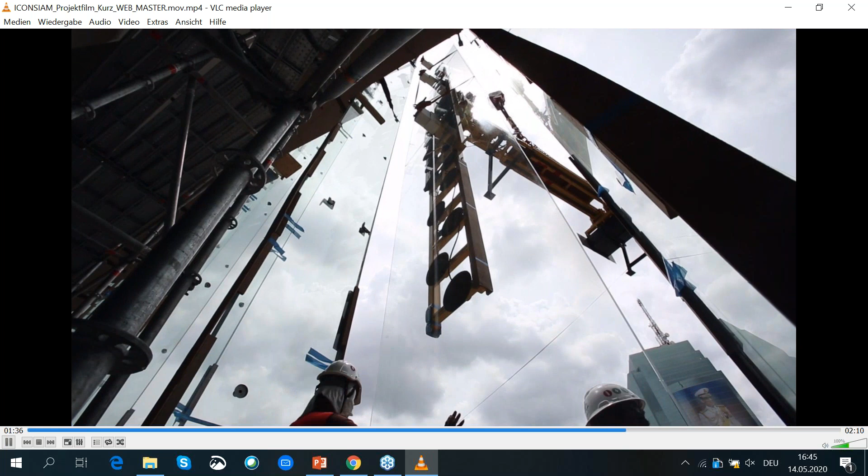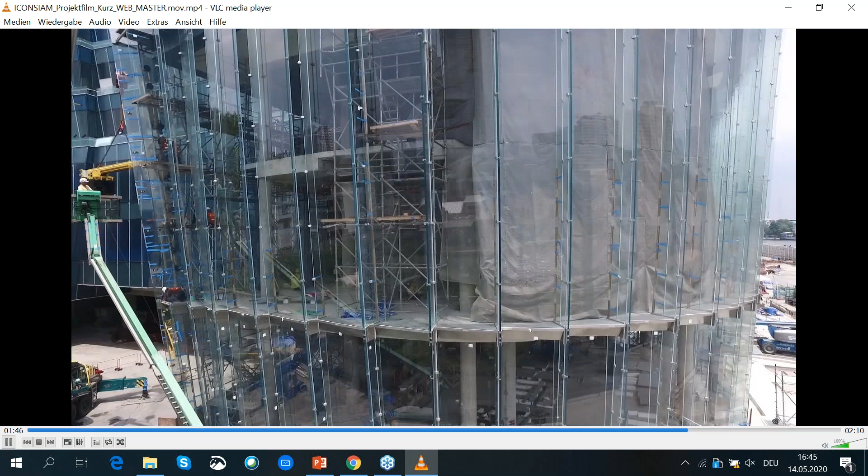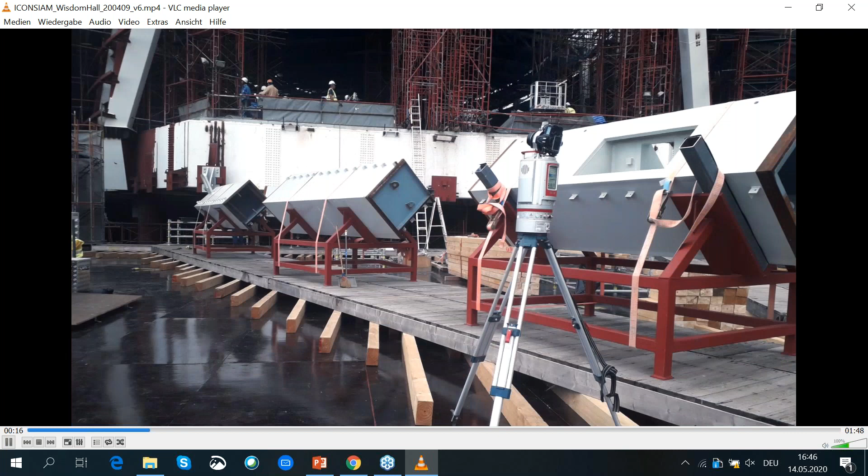And the final product. And now the more fascinating movie, even I think, for the Wisdom Hall. This is really amazing. Let's have a quick look into that. Here on top, you see the Wisdom Hall again. Triangle glass facade with the cables inside. Here you see the pre-assembly of the steel on our huge scaffold platform. Now, welding it together, the huge hinges on the concrete, the welding process, the cables pre-installed.

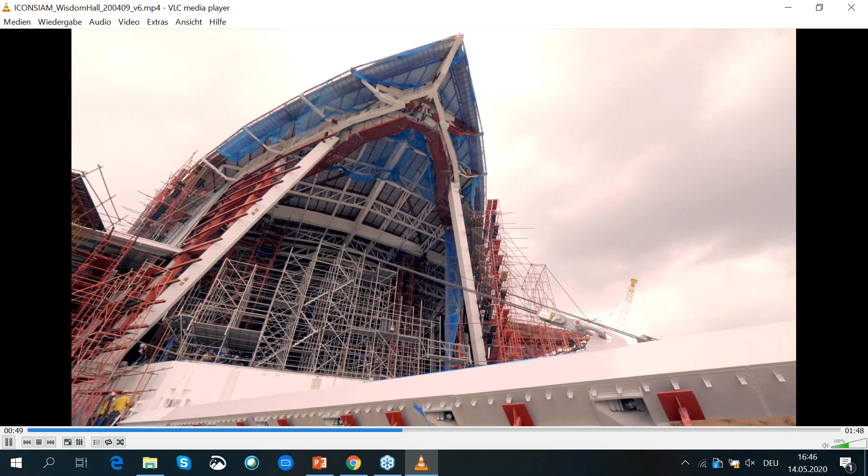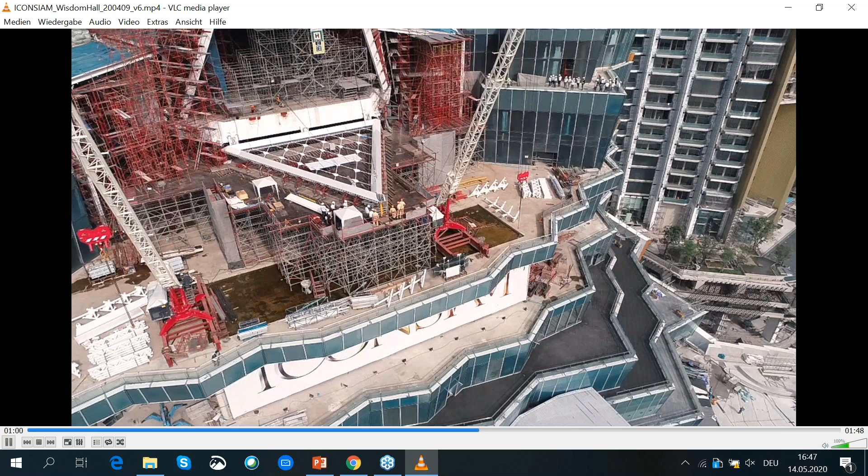And now we come to the lifting. Here the basic idea was discussed, then it was visualized. And that was the idea, to get the whole frame up in one piece. And the most difficult thing, to get the final bolt on the top of the triangle then into its bracket and be sure that it fits. You can imagine that's quite a challenge, because there must not be any mistake in the angle how that thing comes up. So it needs to be top precision.

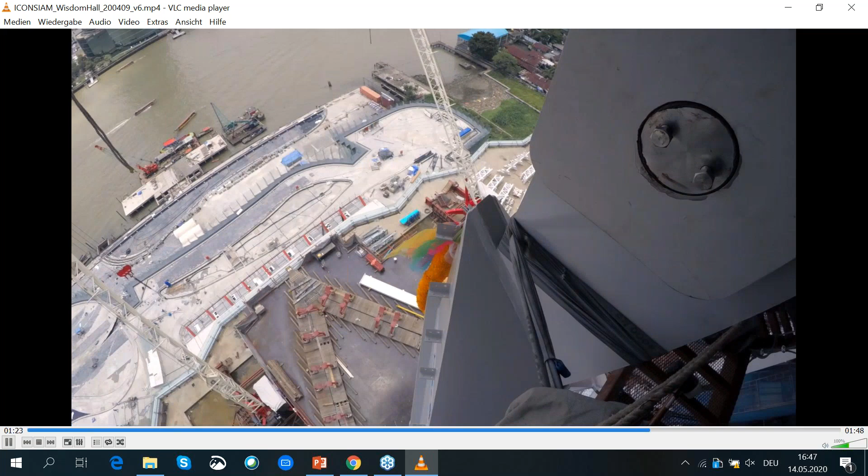Here we are coming up now. We stop. And now the moment to go in. And yes, we did it. It fits perfectly. So this is how we installed that massive triangular frame here for the Wisdom Hall in Bangkok. And that is the final product then.

So thank you very much. And sorry for the little problem with the video, but I hope it was okay as it was now. Yep. So thanks for your attention. Thanks for that interesting presentation. We'll take some questions now. I'll give you a break for a couple of minutes. Can I request Ian to come back on? Can we have a camera switched on? We'll take a few questions. Right, Ian, are you there? I'm here, yeah. Yeah, hi. So Ian, if you can just switch your camera on.

So I'll take the first question for you, Ian. How will you consider the glass delamination for tall glass or curved glass using laminated PVB interlayer as a fixing point? Yeah, sure. So on the analysis side of things, we always allow for a degree of delamination around the fittings. So when we're modeling this in our finite element software, we do take account of that. So that's the analysis side of things.

And then on the other hand, testing is really important. Before we do any new structure that has any laminated fitting, we need to do extensive testing, or more importantly, the contractors like Seele need to do extensive testing to make sure that different geometries are fully understood before they utilize them on projects, because you can't always take what worked on one project onto the next one. You need to check on every individual project normally. There's normally particular load paths or geometry configurations that need to be taken into account. Hope that answers the question. Okay.

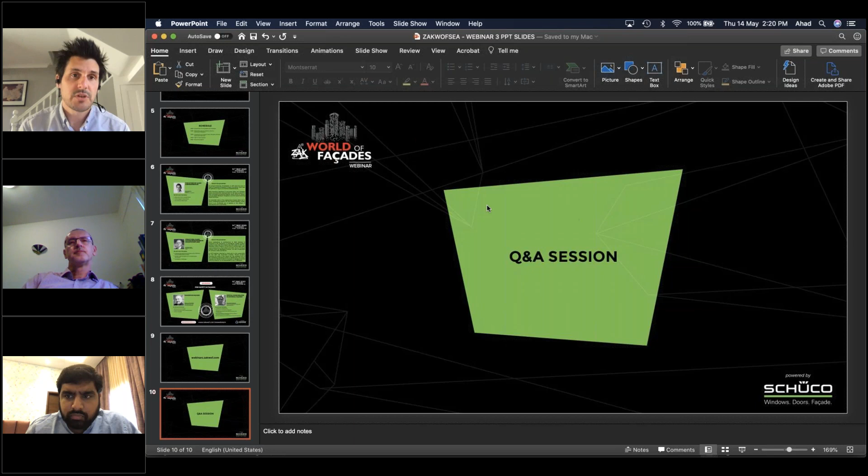Right. So there's another question here. Ian talked about integrating cables within the structural glazing to reach great heights with maximum visibility. Can you give more information on the application? Well, I showed an example in the presentation, which is a project in Hong Kong, but it has been done on other projects as well in the past. I think at the Apple campus, and also the project which Andreas showed in San Francisco with the doors integrates a similar idea.

But it's really very similar to a normal typical cable facade. Normally the cables are set inside or outside the glass and you see them, and we're trying to utilize the fact that we normally have quite thick glass buildup. So we're thinking, why not try and push that into the plane of the glass so that we can hide it, basically, because then that takes away the visibility of the cables, and you can get more of a transparent system.

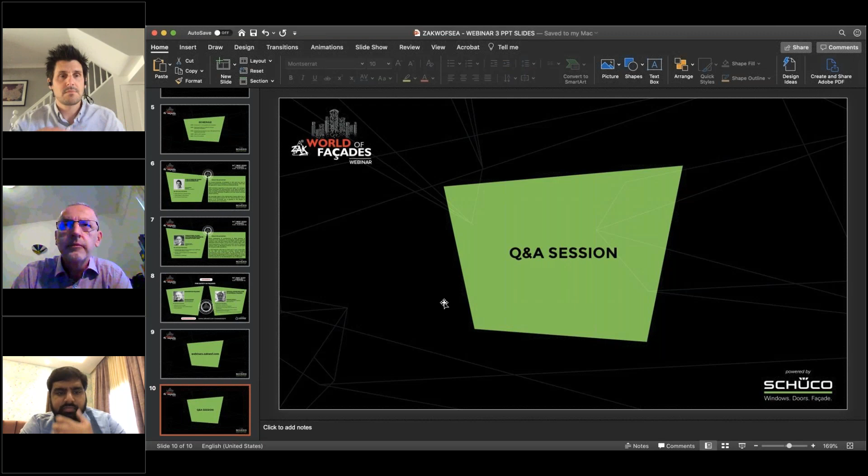Right. Okay. Andreas, I'll take this next question for you. I think this is with regards to the Mahanakhon Skywalk. Are the flooring glass panels supported with point fixing on the two edges? What's the glass construction details, the glass thickness and how many layers? So the point fixings at the edges there, they are not really supporting the glass. The glass is supported by a glass support. It's just lying on something, so to say, and structurally bonded to that.

But the point fixings are there to avoid the glass slipping out from that construction in case of breakage. So that's an additional measure we took here to make the whole construction totally safe. The glass thickness and the glass build-up, I can only share with you it's a multiple glass build-up and it's close to 100 millimeters thick. More details I'm not allowed to share about that.

Right. One more question for you, Andreas. Which was the CAD software used to construct the ICONSIAM luxury facade? We are using different CAD softwares. There is not only one software, we use a whole bunch of it. And frankly, which one our team was using here for the ICONSIAM, I do not know. I'm not aware. But mostly it's a combination of a whole package of facade softwares, of CAD softwares we are using there. And they have to work together with the structural software we are using then again. So it's a combination of different softwares.

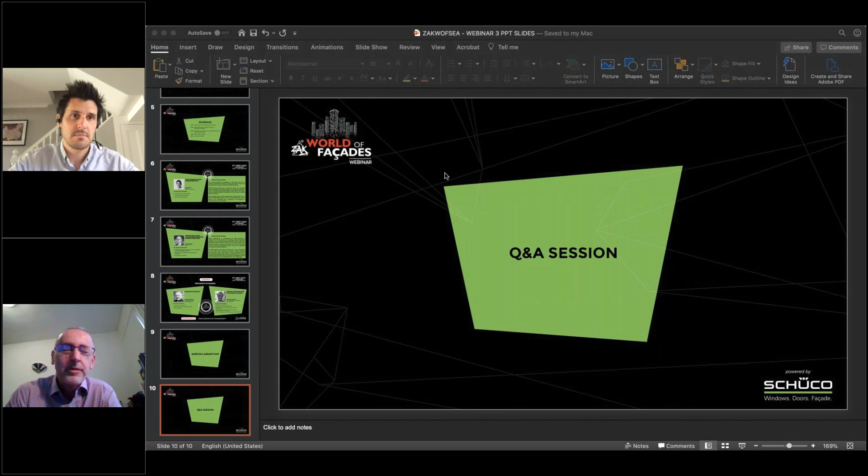Right. Andreas? Yeah, I think the possibilities we have nowadays by using structural glass are simply amazing, and we are more than happy to receive inquiries from interested clients who want to create such highlights on their buildings. So we are very into that. We can also look together with companies like Eckersley O'Callaghan into such projects and realize them, make them reality.